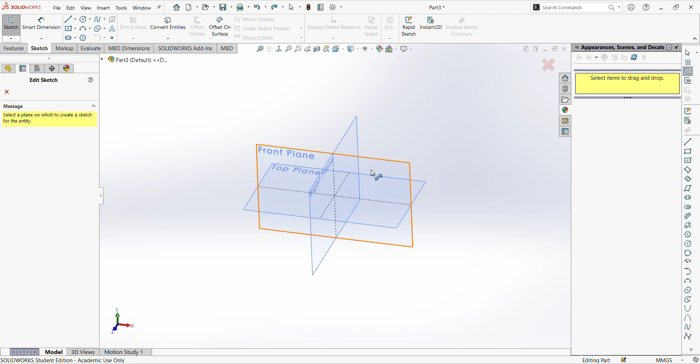If we go on any of these planes, if we sketch it right, where we put the halfway point of the circle that we're going to revolve around the axis at any plane, it should come out the same center of mass property. So let's be thinking about that stuff when we do it. And we could tell from our image over here, we didn't really get that. I didn't really give it that time. And that was for that specific reason, that the mass property can be made any way as long as you do it right. Because we're going to assume that the origin point is at the center. All right, so let's do this.

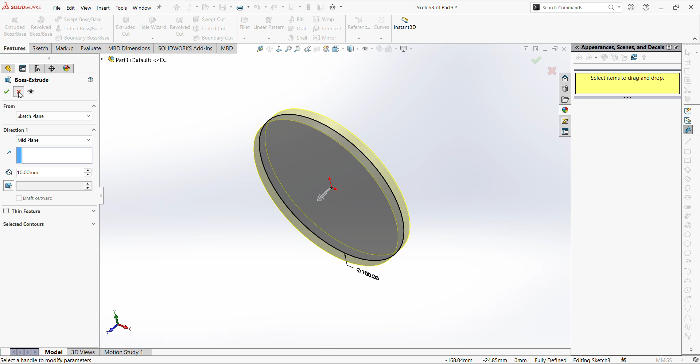We have our circle tool. We could easily just go 100, which gives us that 100 diameter. But I'm going to show you what doesn't work here. You might think that you could just grab this and then maybe extrude it, but we did that last time, right? And that's going to go in one direction. So that's just a cylinder. So you look at your other features. You have your revolve, and we don't really have an axis of revolution to do anything on. To revolve something, you have to do it around something, right?

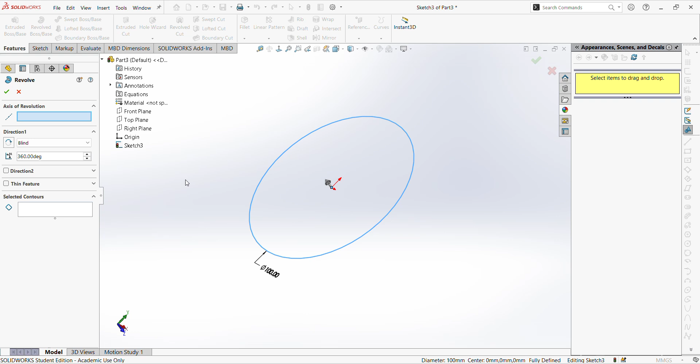Like when you're making pottery, imagine that thing is spinning. The axis of rotation or revolution is directly straight down the center of that plate that spins, and it's perpendicular to the plate. So looking at this now, this wouldn't work. So let's do what does work, and let's think about what would work in this. If we need something to revolve around, let's back out of that revolve tool. Let's go back to our sketch tools.

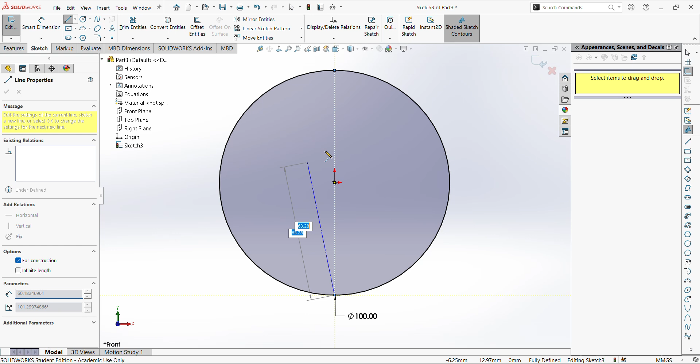If we put a center line down, we would think that we could revolve around this construction center line. But that also wouldn't work because we would end up creating geometry over itself. As this revolved 360 degrees, you would overlap material, and SolidWorks doesn't like that. So we're also not going to do that. We're gonna do the one thing I like to do with this. This is the easiest way.

Let's cut this circle in half. Let's make a half moon, and let's trim this edge. Now we have, imagine a 1/1000th or 1/millionth or whatever type slice of this ball. This makes sense, right?

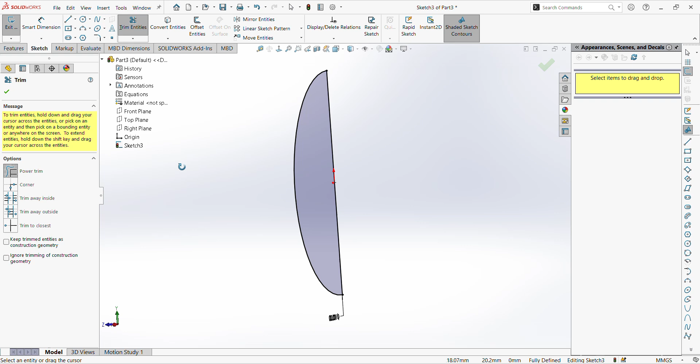If we start to spin it around that axis and we fill in as we spin, it wouldn't go over itself and it would fill in the ball. So we can do this 360 degrees, and SolidWorks will accept that. So let's go back over to our feature tool and let's revolve it. So the axis, of course, is going to be that line, and we can see SolidWorks automatically fill it in.

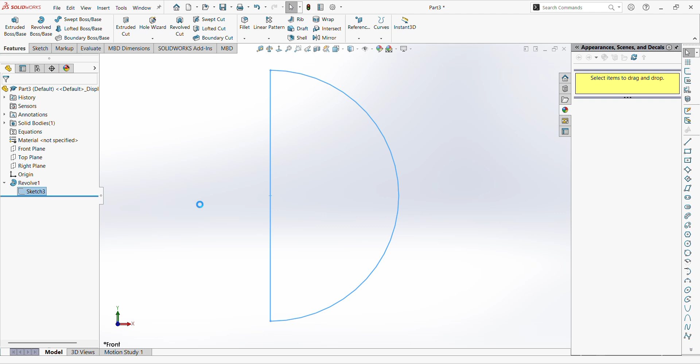So that's cool. Let's go back to our sketch and look at something now. Because we used that circle tool and we made it at the origin, the center point of this arc is the origin, which creates the center of mass at the origin as it revolves. So if you look at our center of mass, it's going to be 0.

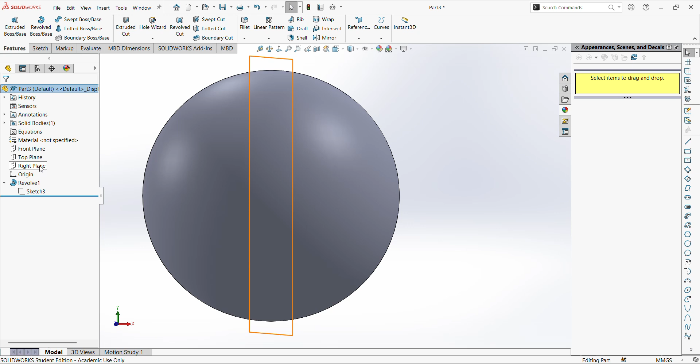And let's go back and think about this. If we did it around any plane, a half moon and revolved, and we were around that center point, we would always have 0, 0, 0 for our mass property center of origin. Our mass would always be the same as well because we're not changing the density or the material or anything like that. So none of this would change. So that's why in this type of view, you don't really need that kind of specificity.

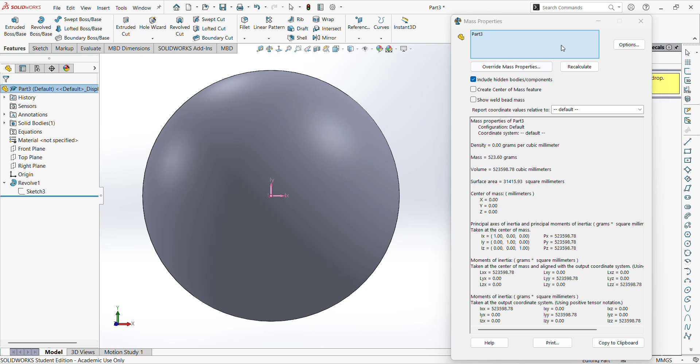Now, if someone wanted it, they could easily put an origin point down here at the corner, a little origin dot, and that would change everything drastically. We would need to go back to our sketch, and we would need to make this out here. We would draw our circle and make our relation to that, and I could show you that real fast. It's not all that bad. A quick circle that we're going to say is 50 radius, so 100 diameter.

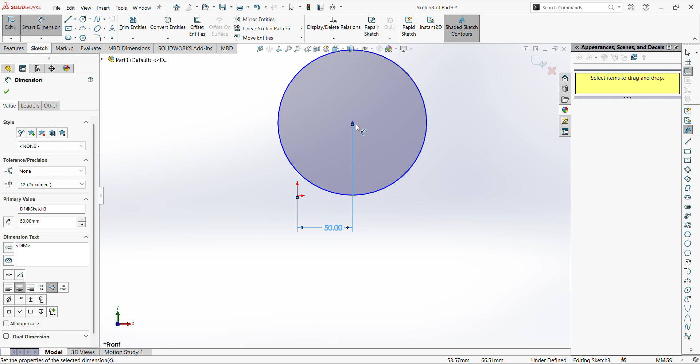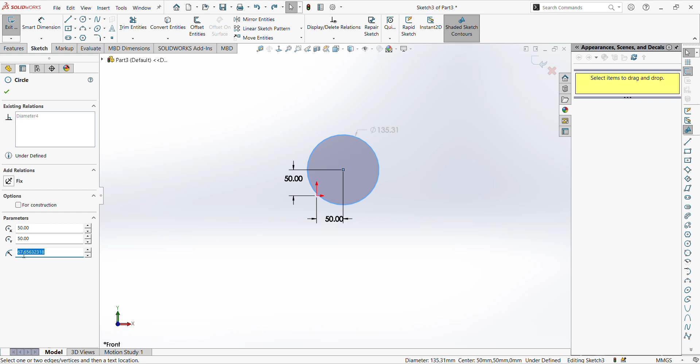And if we take this and we tell it the dimension from this is 50. Oh, let's not do that. We tell it this dimension. I'm in trouble here. Is 50. Well, this actually should be 100. What am I doing? Wait, what the hell? What's this diameter? Oh, that's why. I don't know why that happened. We saw me put in 50, but the diameter changed. So that's weird. Let's fix this. There we go. That was what I was expecting to happen. Ooh, not that. So you can see how quickly errors pile up on you within SolidWorks.

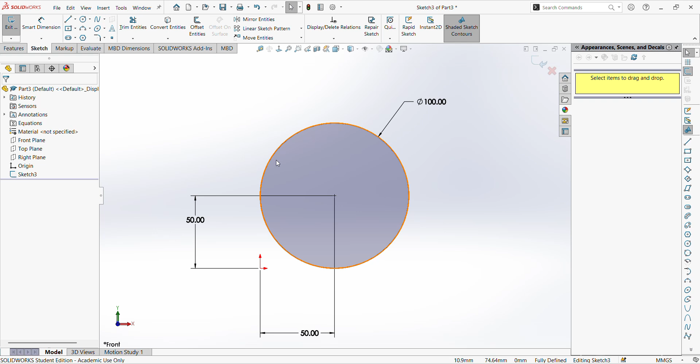So let's delete this and back out. Sometimes it is a little bit easier just to, and this is actually something I was taught by my teacher in SolidWorks, it's a lot easier to just start over than it is to fix in SolidWorks. And I will attest to that 100 times over. So when things start getting weird and you start thinking things should work, delete the part and start over. It might just be faster, it might be easier. So deleting that feature worked this time, which was cool, but sometimes it doesn't.

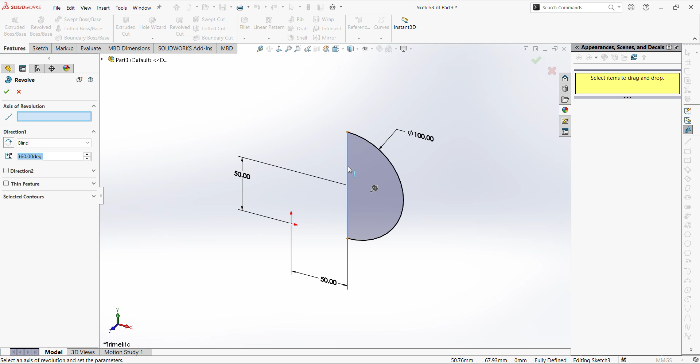But now we have our 100 diameter, 50-50, and we can now put our line down, which we learned earlier, and we can trim this because all the relations are to this center point, which is what we like. And now if we revolve it, I keep jumbling that word, sorry. We'll see that that ball is, like I talked about, now off of that center point, that origin. And all of our mass properties centers should change, except for our Z.

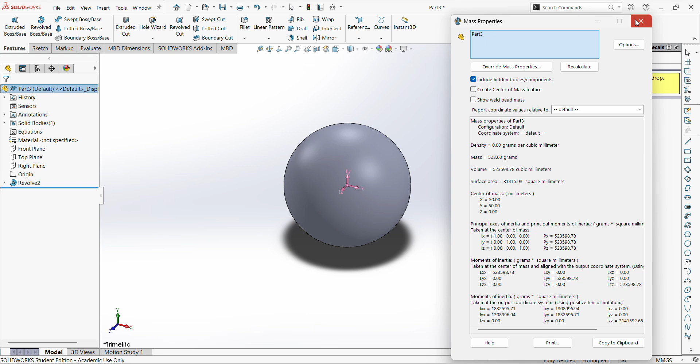And that one would only change, if we think about it, every time we change the plane we extrude on, I believe. And you can correct me if I'm wrong on that. Yeah, I believe it's only the plane. Someone go do some testing on your own and maybe comment and let me know if that's wrong. But I believe that one would always be 50-50 and 0. One of those would change depending on the plane you revolved around at this point now. But before, like we said, it wouldn't because we were right on that center.

So depending on what your drawing asks for, you build it that way. This one we're making some assumptions like we normally do, that we're assuming that they built it out from the center because that makes things in the center of mass simpler. Okay, I think that's all for the ball example. Pretty cool. We learned a few different things. Revolve tool, center of axis for revolving, and the different ways it messes with the mass properties, and the different planes that you could do with symmetrical objects.